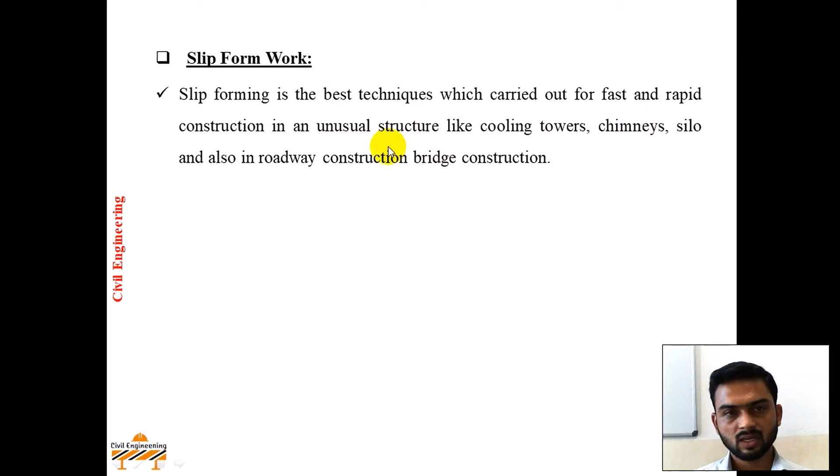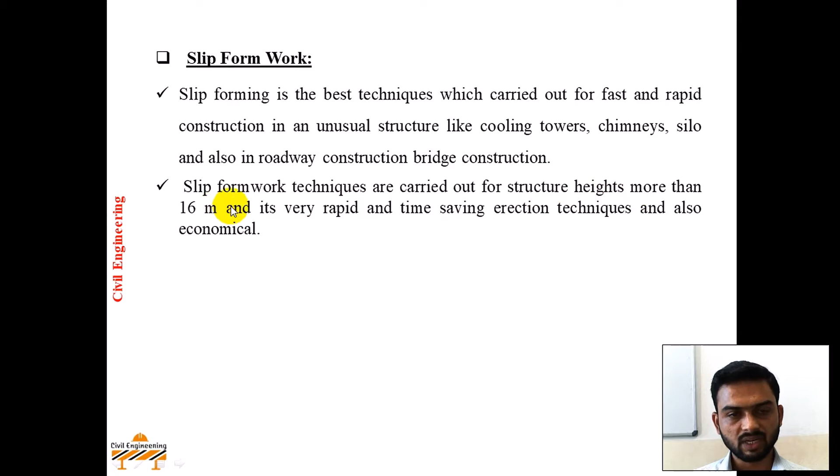In this lecture we'll study slip form work or slip form technique. It is the best technique for fast and rapid construction of unusual structures like cooling towers, chimneys, silos, and also in roadway and bridge construction. Slip formwork techniques are carried out for structure heights more than 16 meters, and these are very rapid, time-saving erection techniques, and also economical. The slip form technique considers mainly 7.2 meters per day, which is the fastest erection procedure.

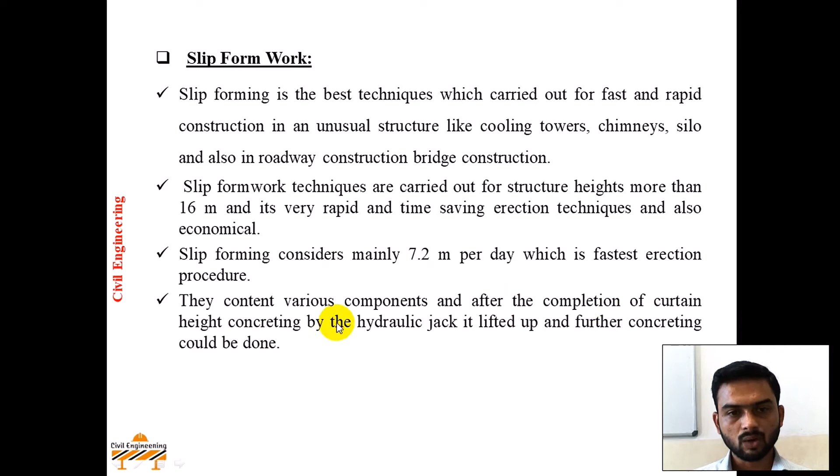The setup contains various components, and after completion of a certain height, concreting by the hydraulic jack is lifted up and further concreting could be done. The slip form technique used for cooling towers and chimneys is nothing but vertical slip form technique, and the one used for roadway or bridge construction is nothing but horizontal slip form technique. Hence, these methods are rapid, time saving, economical, and require less labor.

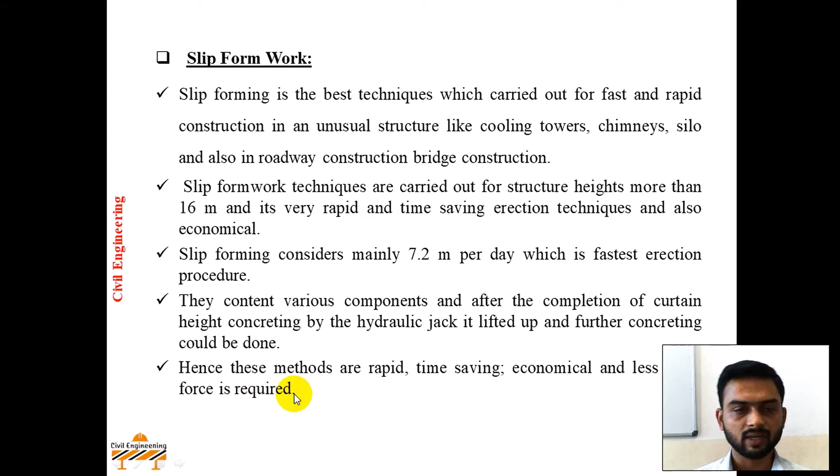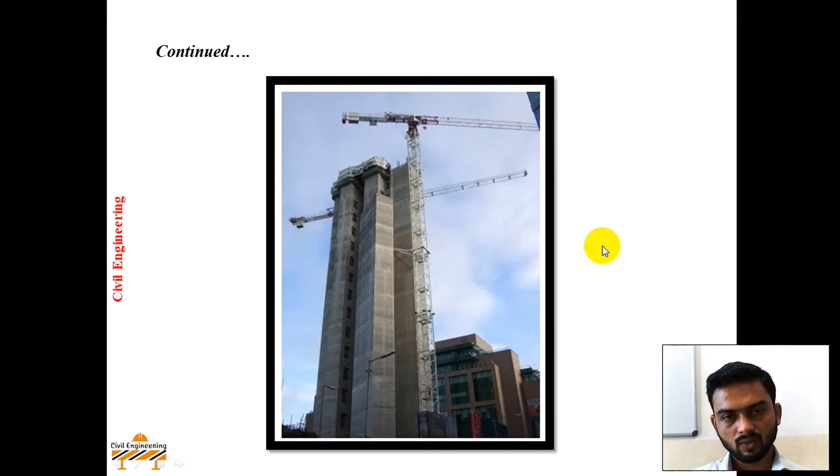Now in this figure you can see the slip form technique. In the upcoming animated video you will see what slip form technique actually is. Let's see.

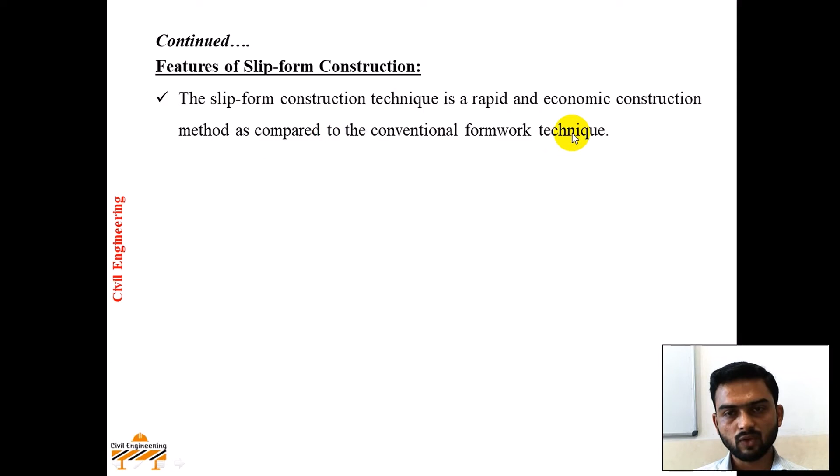Next, features of slip form construction. The slip form construction technique is a rapid and economic construction method as compared to the conventional formwork technique. This helps to achieve huge cost savings. The technique is best suitable for large building structures and bridges. When small structures are concerned, projects with identical geometry can be easily completed by the slip form construction. Projects with identical geometry means repetitive buildings of the same size and shape.

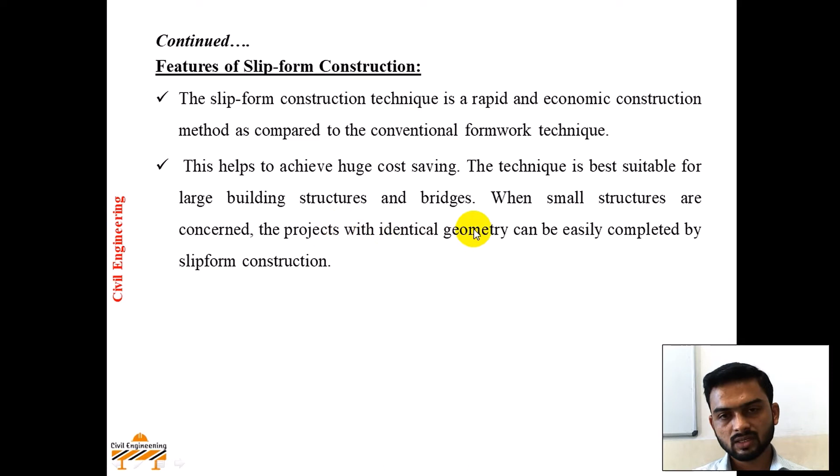Continuous movement of formwork in the upward direction is performed in the slip form technique. This movement is facilitated by hydraulic jacks and jack rods. In the construction of vertical structures, the rate of rising of the formwork upwards will be almost 300 mm per hour. This rises with the help of supports from other permanent parts of the building. For this type of construction, mostly rapid hardening cement is used.

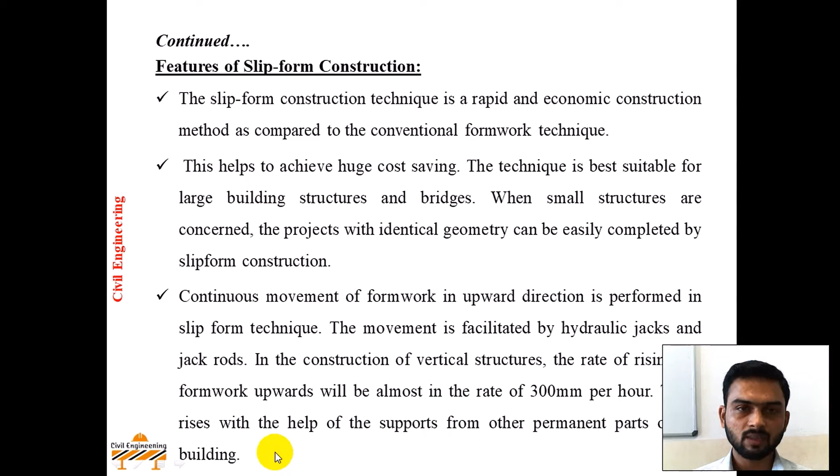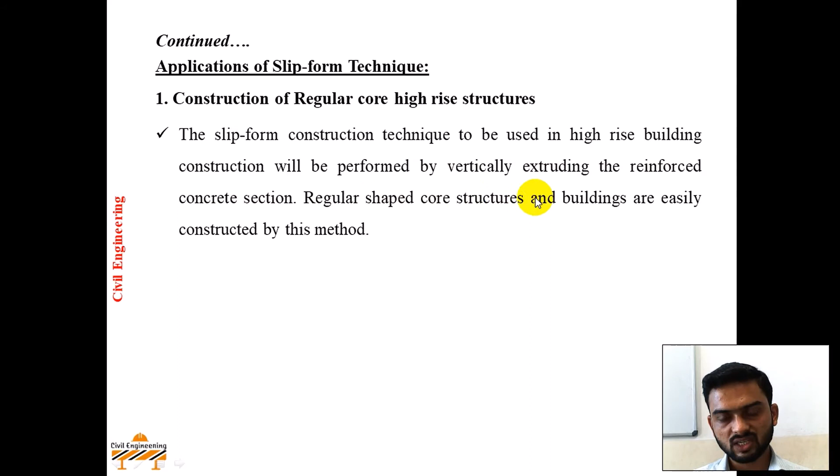Now, applications of slip form technique: construction of regular core high-rise structures. The slip form construction technique used in high-rise building construction is performed by vertically extruding the reinforced concrete section. Regular shaped core structures and buildings are easily constructed by this method.

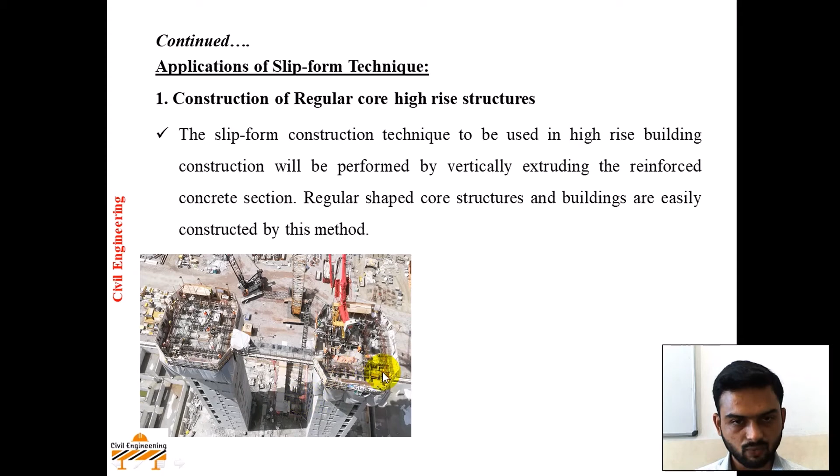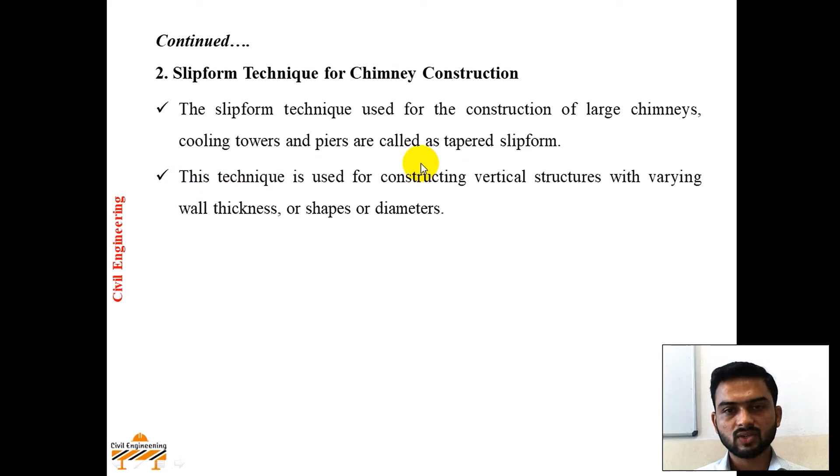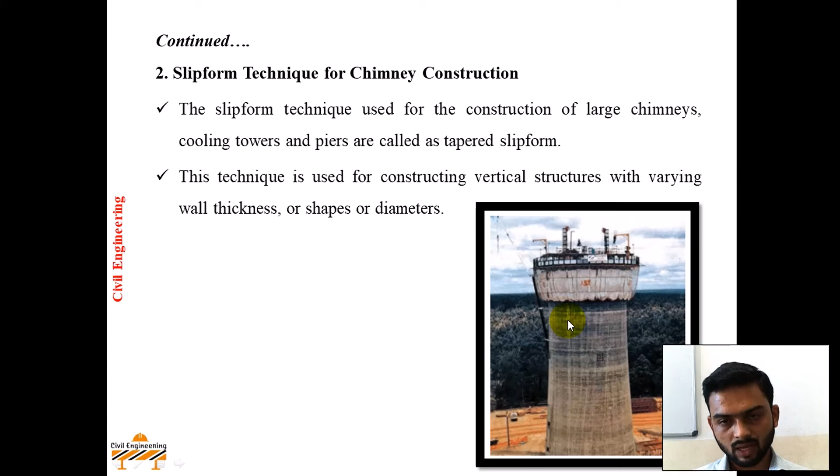Next, slip form technique for chimney construction. The slip form technique used for the construction of large chimneys, cooling towers, and piers is also called tapered slip form. This technique is used for constructing vertical structures with varying wall thickness, shapes, or diameter. Here you can see the chimney structure whose thickness or shape changes accordingly throughout its height.

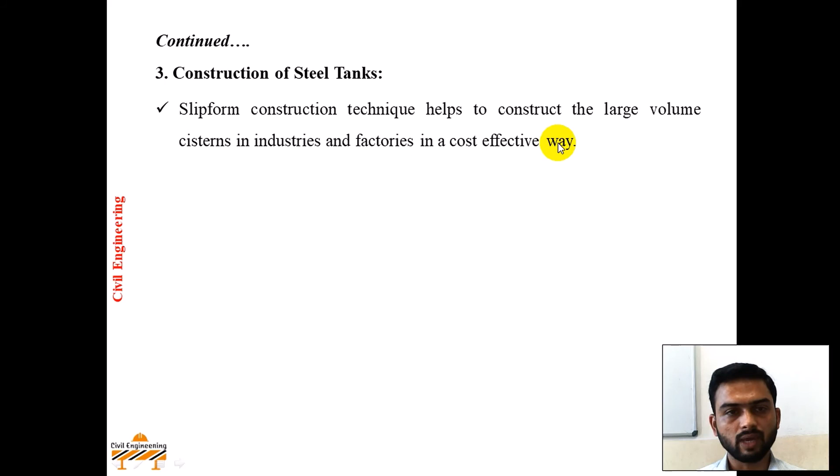Third, construction of steel tanks. Slip form construction technique helps construct large volume cisterns in industries and factories in a cost-effective way. Construction of water towers: the slip form technique helps construct the walls of water tanks uniformly with better quality. Tanks of thousands of liters are easily constructed by this method.